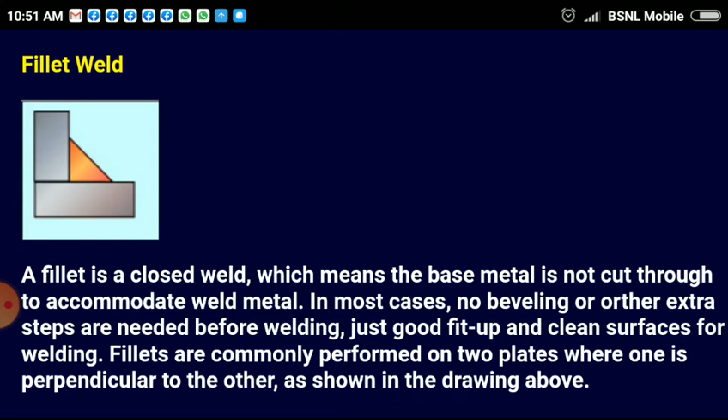Next is groove welding. According to the American Welding Society, a groove weld is a weld on a workpiece surface, between workpiece edges, between workpiece surfaces, or between workpiece edges and surfaces. The actual weld groove is a channel in the surface of the workpiece or an opening between two joint members, providing space to contain weld metal.

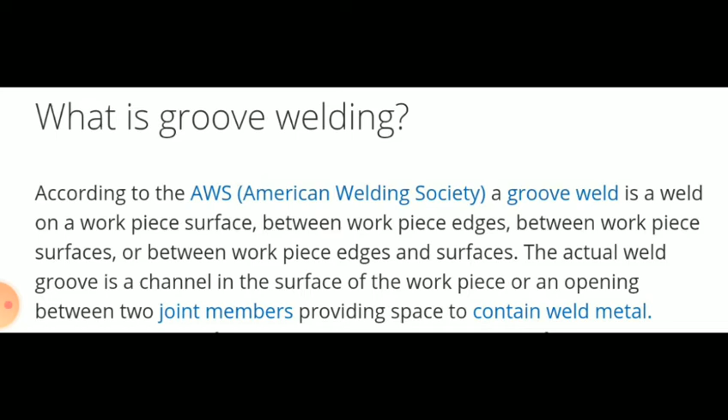So edge preparation, or the V or the beveling, is done on one of the plates or on both the plates. The groove is made and weld metal is filled in that groove, so that is called groove welding. You can see in the diagram, a square groove.

Beveling is not done in the top diagram, so it is a square groove. Then the bevel groove, the beveling is done on one of the plates on one side. Double bevel, the beveling is done on one of the plates on both sides, and the other plate is made square.

Then V groove, that is single bevel, is made on both the plates. Then double V, beveling is done on both the plates and both sides. Then the J groove is made on one plate and the other plate is flat or square. Then U groove, single U, is made on both the plates on one side. Then double J is made on one plate on both sides and the other plate is square. Double U, the U is made on both the plates on both sides.

Then the flare bevel and the flare V.

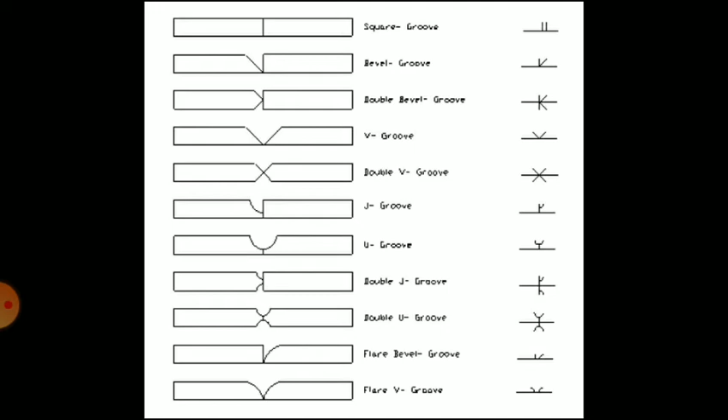A number is used to define the position, and an F for fillet and G for groove. So when you have to define the position of the weld, the number is given. For a fillet weld it is F, and for groove it is G, referring to the type of weld. F means it is a fillet and G means it is a groove.

The first one refers to flat position, either 1F or 1G. The number one is given for plates that are completely placed flat. So 1F or 1G means the position of the plates, or the position of the weld, is flat. 1F means flat position fillet weld, or 1G means flat position groove weld.

2 refers to a horizontal position, either 2F or 2G, meaning horizontal position fillet weld or horizontal position groove weld.

3 is a vertical position, either 3F or 3G. 3F means vertical position fillet weld, or 3G means vertical position groove weld.

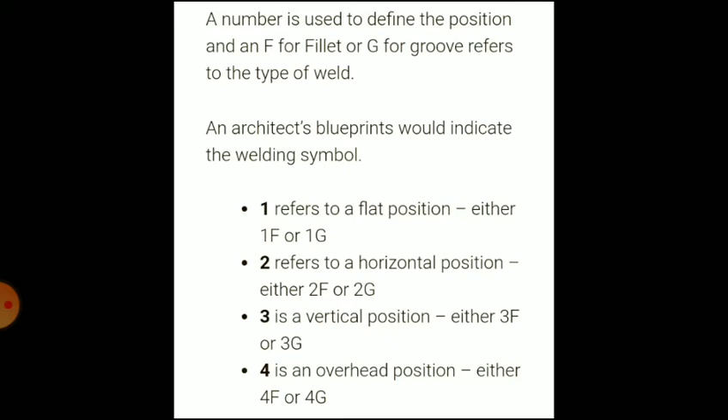4 is an overhead position, either 4F or 4G, meaning overhead position fillet weld or overhead position groove weld. So this is the specification of the position of the weld.

So you can see the different diagrams. For the first number, flat position 1F and 1G, you can see on the top diagram on the left hand side, indicated by flat position 1F. 1F means it is a flat position fillet weld, where two plates are placed at an incline to make it completely flat.

1G means it is a flat position groove weld. Grooves are made by beveling on both sides of the plate, and both plates are placed completely flat for making the weld. For the fillet, two plates are placed at an angle or at 90 degrees, and it is made completely flat by inclining for the welding.

So the first type is flat position. Number 2 is given for the horizontal position, where two plates are placed horizontally. 2F is for the fillet weld, and 2G for the groove weld. For groove weld, the beveling is done on both plates, and for fillet, beveling is not done, only corners are filled.

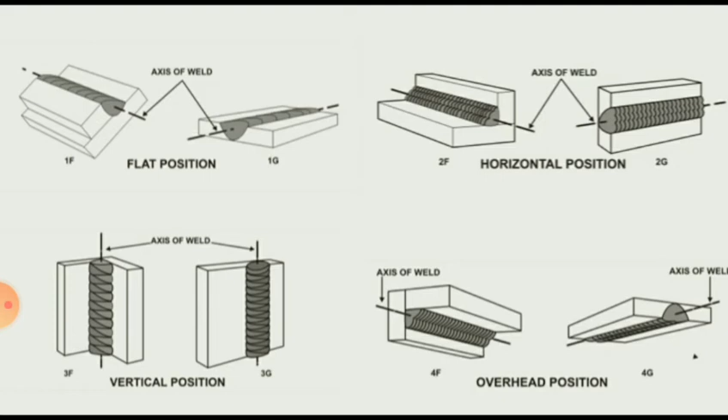Overhead position, you can see 4F. Number 4 is given for overhead position. 4F means fillet weld, and 4G means overhead position groove weld. The groove is made on overhead plates, placed overhead, and the welding is done. This same diagram is given for flat, horizontal, vertical, and overhead positions.

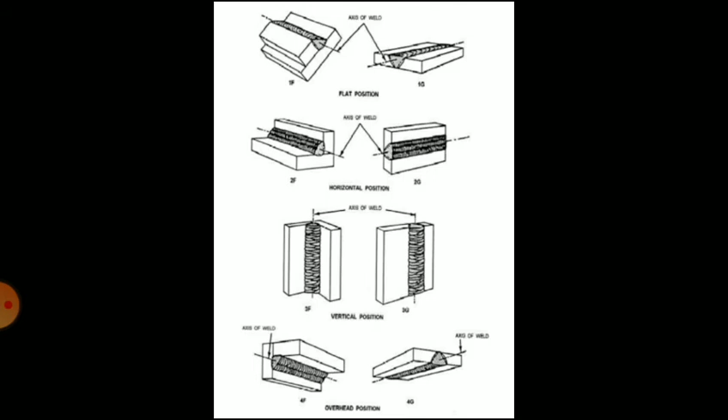So flat position, you can see the flat position. We will discuss what is 1G or 1F. This type of welding is performed from the upper side of the joint. The face of the weld is approximately horizontal. So you have to do the welding on the upper side of the joint. Flat welding is the preferred term.

However, the same position is sometimes called downhand. The axis of the weld is a line through the length of the weld, perpendicular to the cross section at its center of gravity. In a workshop or fabrication work, generally this type of position is preferred, where plates are placed on a table in a flat position and welding is done.

So that is flat position, 1G or 1F. G is for the groove - if the groove is made, it is called 1G, and 1F means it is a fillet weld, where groove is not made. In flat welding, plates to be welded are placed on a horizontal plane, and weld bead is also deposited horizontally. You can see in the diagram two plates placed horizontally.

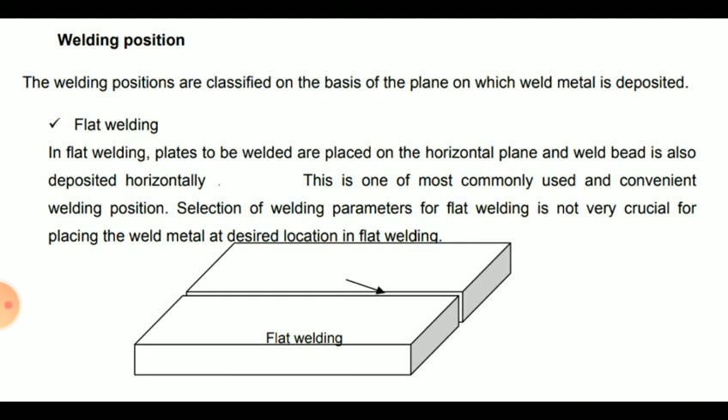Welding is done from the top side. This is one of the most commonly used and convenient welding positions. Selecting welding parameters for flat welding is not very crucial for placing the weld metal at the desired location. So this is the first welding position, that is flat welding.

Horizontal position, that is 2G or 2F. This is an out of position welding position. It is more difficult compared to the flat position, and it requires more skill from the welding operator to do them well.

2G is a groove weld position that involves placing the weld axis in a horizontal plane or approximately horizontal. As for the face of the weld, it should lie in an approximately vertical plane.

2F is a fillet weld position in which welding is done on the upper side of the surfaces that is approximately horizontal, that lies against a surface that is approximately vertical. In this position, the torch is usually held at a 45-degree angle. You can see this in the diagram.

Horizontal welding: two plates placed vertically on one another, and the welding is done horizontally from left to right or right to left. So that is called horizontal welding. If edge preparation or beveling is not done, it is a fillet weld. If the edge preparation or beveling is done on one of the plates, it is called a groove welding.

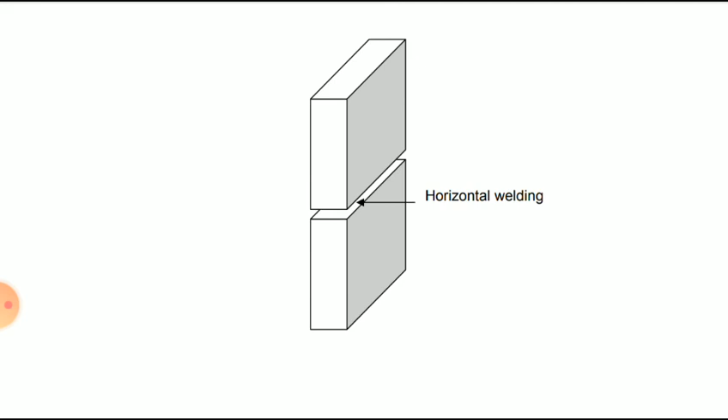So horizontal welding: plates to be welded are placed in a vertical plane while the weld bead is deposited horizontally from left to right or right to left. This technique is comparatively more difficult than flat welding. Welding parameters for horizontal welding should be selected carefully for easy manipulation or placement of weld metal at the desired location.

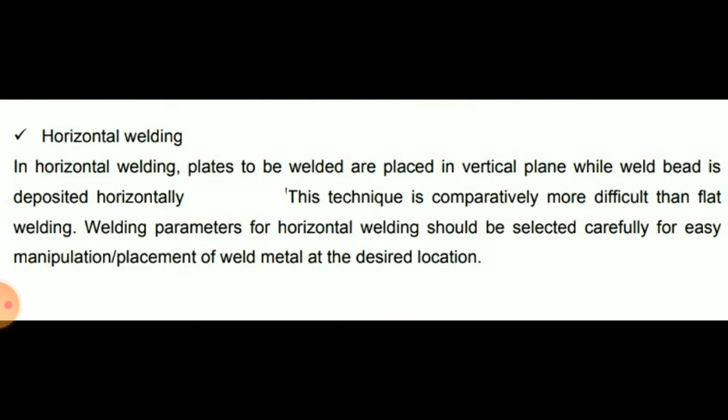Then vertical position, that is 3F and 3G. 3 means it is a vertical position. F means it is a fillet weld. G means it is a groove weld. In this position, both the plates and the weld lie vertically or almost vertically. The 3F and 3G refer to the vertical fillet and vertical groove position.

When welding vertically, the force of gravity pushes the molten metal downwards, and so it has a tendency to pile up. To counteract this, you can use either an upward or downhill vertical position. In the upward vertical position, point the flame upward, holding it at a 45-degree angle to the plate. This way, the welder will use the metal from the lower parts of the workpiece to weld against the force of gravity. In the downhill position, the metal from the upper parts and the electric arc's kinetic force is used.

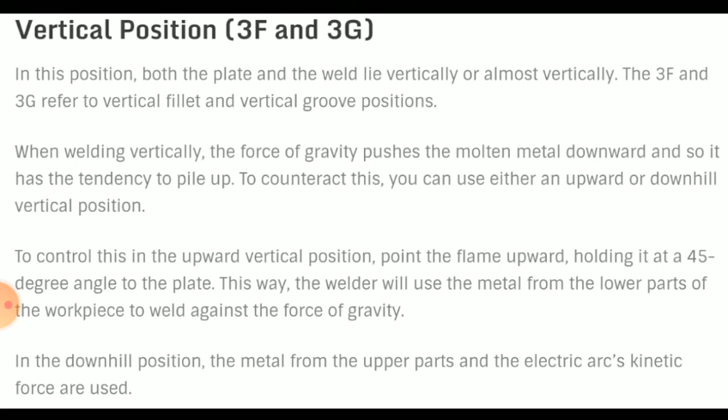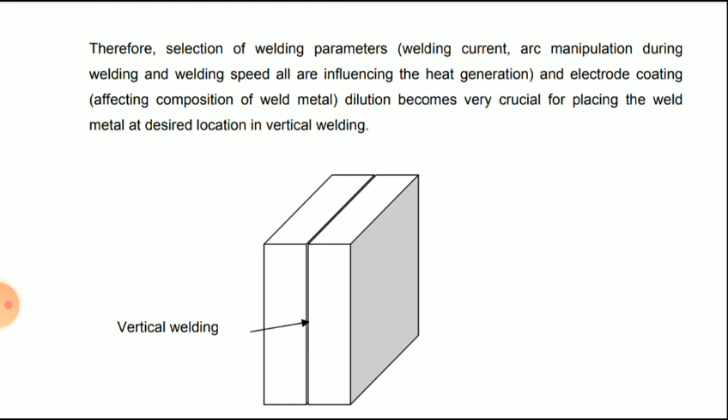So you can see vertical welding. You can do the welding in a vertical side from top to bottom or bottom to top. Therefore, selection of welding parameters, welding current, arc manipulation during welding, and welding speed influence the heat generation. And electrode coating dilution becomes very crucial for placing the weld metal at the desired location in vertical welding.

Overhead position means it is 4F or 4G. In this position, the welding is carried out from the underside of the joint. So the plates or workpieces to be welded are overhead, and the welder or operator welds those plates from the bottom. It is the most complicated and difficult position to work in.

The 4G and 4F positions stand for groove and fillet welds respectively. In the overhead position, the metal deposited to the joint tends to sag on the plate, resulting in a bead with a higher crown. To prevent this, keep the molten puddle small. If the weld puddle becomes too large, remove the flame for a moment in order to allow the molten metal to cool.

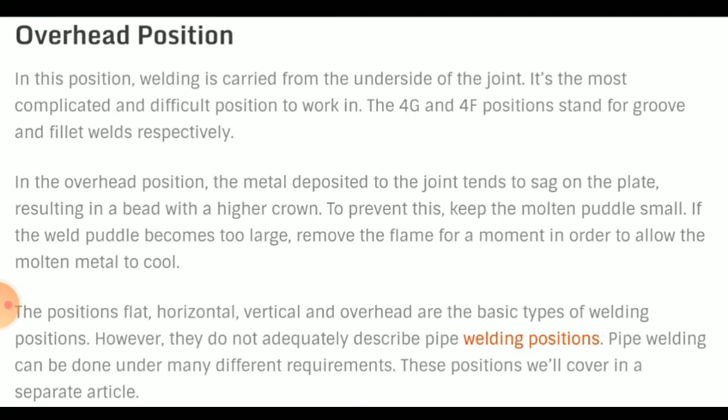The positions flat, horizontal, vertical, and overhead are the basic types of welding positions. However, they do not adequately describe pipe welding positions. Pipe welding can be done under many different requirements, so we will see that in a separate article.

So this is a diagram. All the positions that you can see in the diagram: vertical position, overhead position, then the flat and horizontal position.

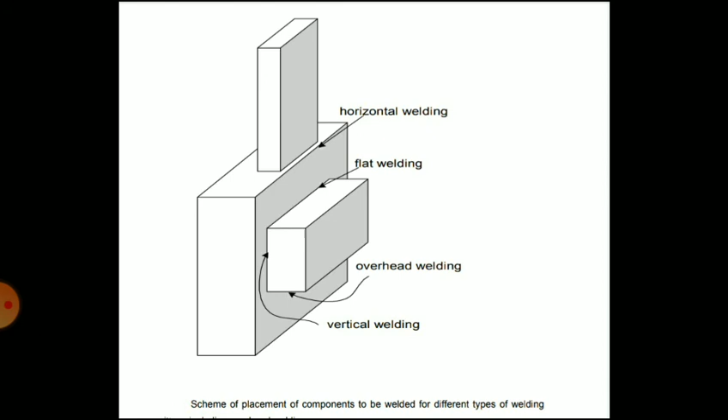So this is a fillet weld. No edge preparation is required, or no beveling of the plates is required, only corners that we have to weld. So it is flat position 1F, horizontal position 2F, vertical position 3F, overhead position 4F. F is for fillet.

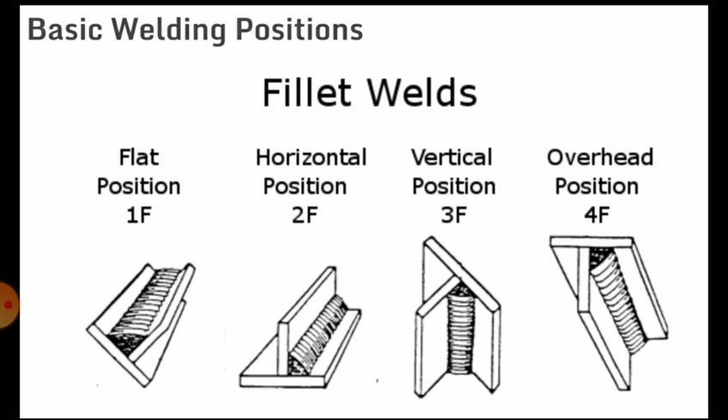And groove weld, the edge preparation or beveling of the plates is required. So flat position 1G, horizontal position 2G since G is for groove, vertical position is 3G, and overhead position is 4G. Thank you.